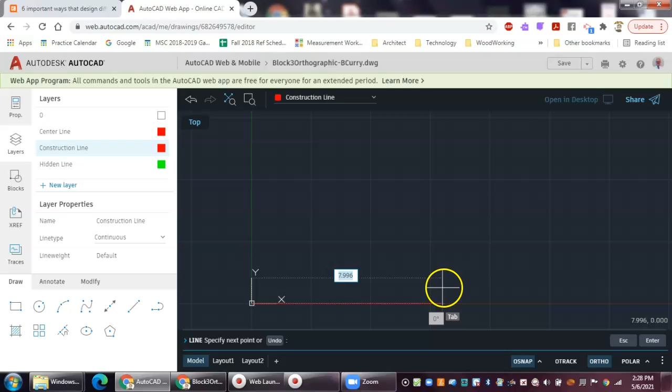In this case, I want a 20-inch line. So I move my cursor to the right, at 0 degrees, type in 20 on the keyboard, and hit enter, and I've got my line. Now I'm zoomed in a little too far, so I'll right click and confirm to drop that line, then zoom out.

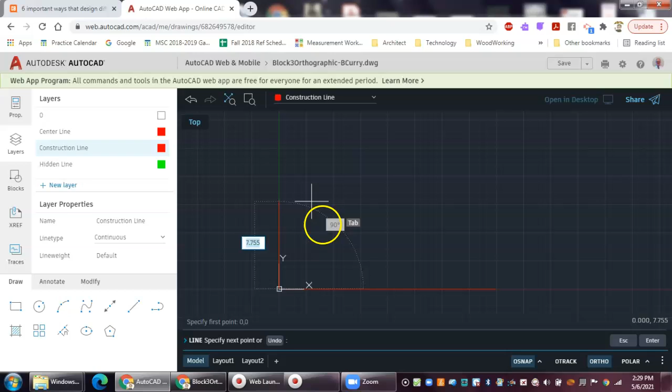So there we go. Now I'll do the vertical line here too. My left hand enters 0, 0, hit enter, move my cursor up, type in 20 and enter, and I've got that line. I'll right click to confirm and get out of it. So there's the start of my lines.

Now I'm going to go into my modify panel to the offset tool, and this is where I want to start developing my different lengths here for my width, my height, my depth, those parts that we give to you. So my width of this part is going to be 6. Now read what it says in the command bar: offset, specify offset distance or through, erase, layer. You don't know what through or erase or layer is just yet, so we're just going to offset that distance. We know our width, so when we offset this vertical line first, that first space we're doing is for the width of it.

In this case it's 6 inches, so I'll enter 6 and hit enter, select the line, and move it to the right. Notice it's there — if I hit the enter key on the keyboard it kind of takes it off, so we'll do this again: 6, enter with the keyboard. Now I'll left click with my mouse, move it over, and left click to place. Now I'm going to click on the line I just dropped — the next vertical line will give us our space between views.

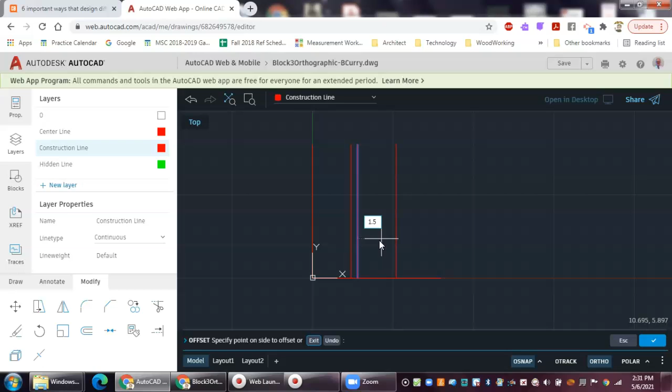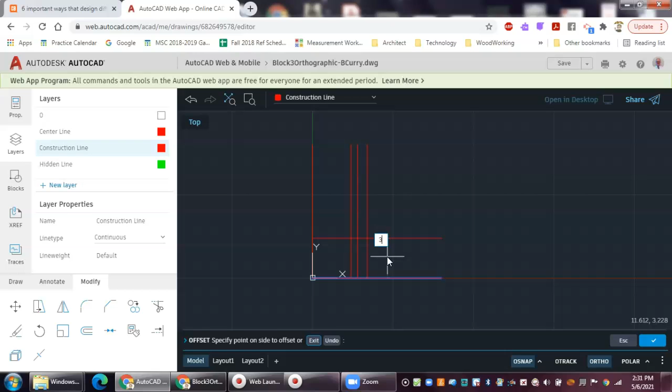Again, this isn't 6 inches, but this is going to represent our depth, which should be 1.5, and enter with the keyboard. Now I'm down here for my horizontal, and I'm going to go up. Don't just place it at 6 inches, because then you'll have a 6 by 6 inch block. Our block isn't 6 by 6, it's 6 by 3. So I got to set this for my height, which is 3 inches. Enter using my keypad. I click that line, move up.

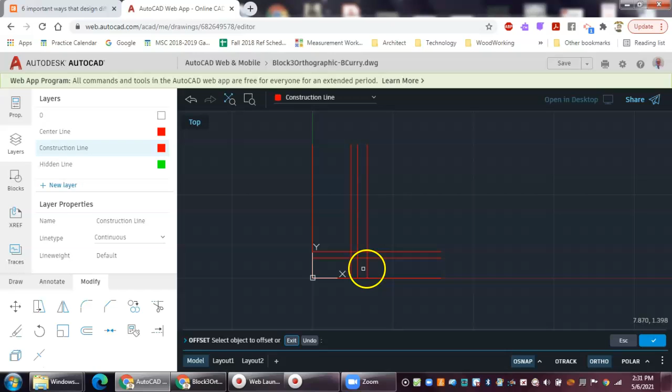This is my spacing between views here again, so I hit 1 and enter on my keyboard. That way I got 1 inch spacing between my front and side view, and 1 inch spacing between my front and top view. Now this last horizontal line that I'm placing represents my depth, so 1.5 here and enter.

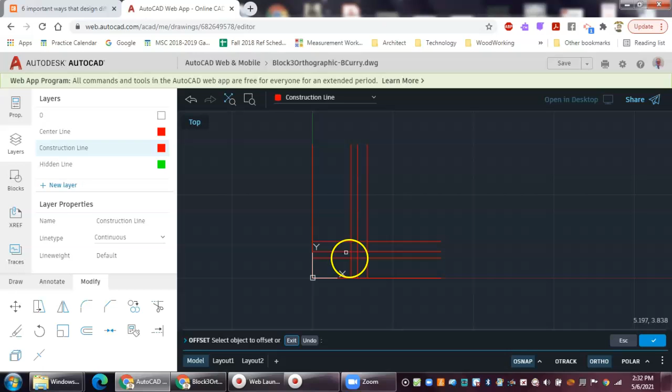So I've got those in, and you're still saying, okay, well, where's the 8th line or the 9th line? I only got 8 lines there, 4 vertical and 4 horizontal. So that 9th line comes from a special place. It comes from right there.

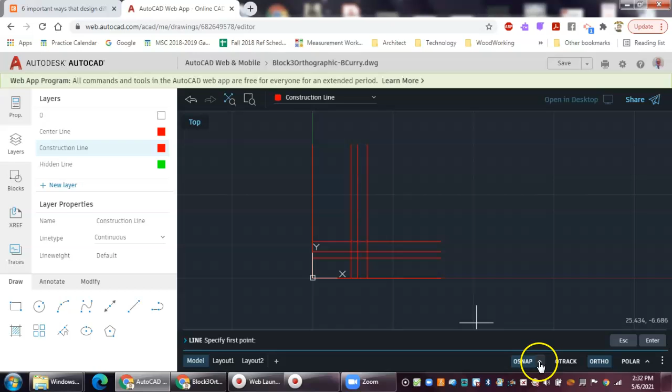Let's go back to our draw panel, our line tool. Notice I'm coming over here, nothing's kind of clicking, so none of my snaps are turned on. So let's come over here, I'm going to hit that drop pop-up window, and select, in this case, intersection. Now notice how it gives me that point, so I'm going to left click there for my line.

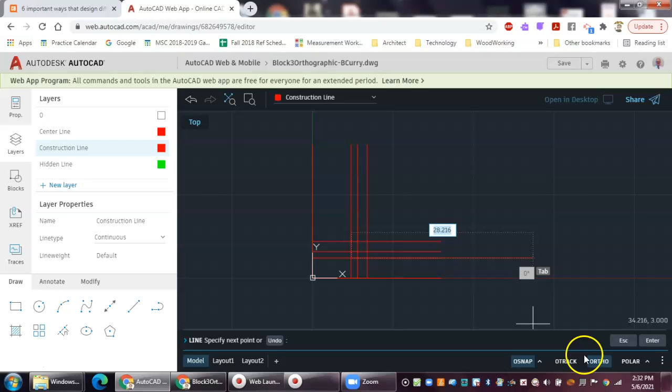Notice how it's still wanting to just give us vertical or horizontal. That's because we still have ortho turned on, so let me turn ortho off. Now I can come in here, and this is just going to be a 5-inch line. I'm going to hit 5, tab over, and do 45 degrees, enter. So there we go, right click to confirm and exit out, and I got my 9 lines on here.

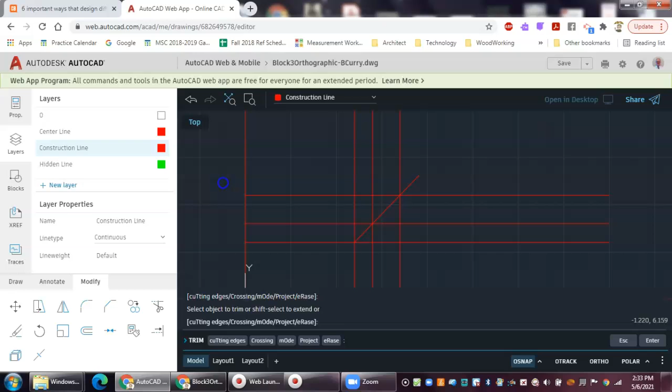Now we're going to trim out these that we don't need. Back to my modify panel, use my trim. I'm going to come up here, press down and hold on the left mouse button, and just kind of move over those lines to trim all of them out. And I'm done, so I can just click on the check.

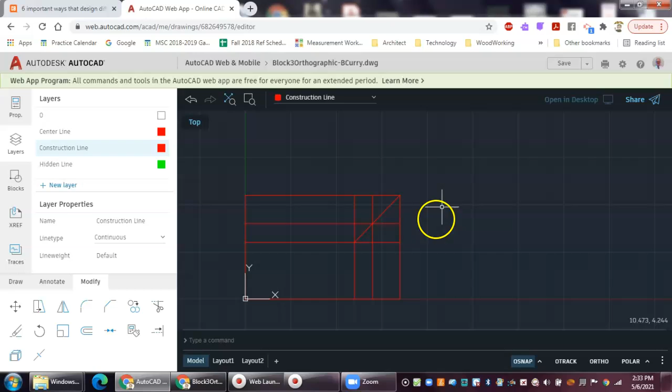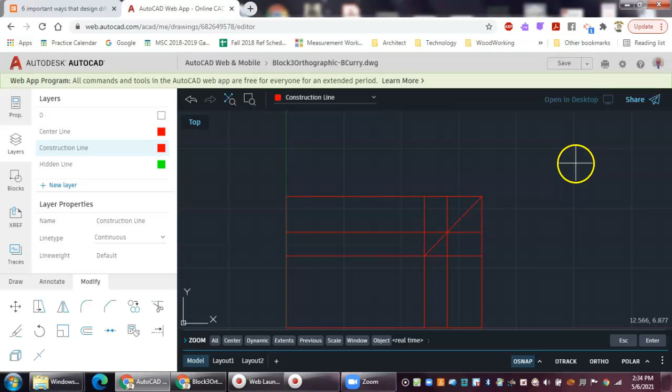So I'm going to do a zoom all. Again, notice my right hand is still on the mouse, I'm just taking my left hand to the keyboard. I'm going to hit Z, enter, A, enter for zoom all. Or I can go Z, enter, notice all the commands down here. I could go ahead and move my cursor over, but if my cursor's over here, that's a lot of wasted movement. So it's easier in this case just to use my keyboard for entry, and I'll type E for extents and hit enter, and zoom in a little closer.

All right, so there is where we've got our 9 lines. This represents the outside dimensions of each of those views of my block. Now I want to get where the inside features are going to be, so I'm going back to our CAD drawing here. So again, we know that we've got this inside feature here, and this should look like a U.

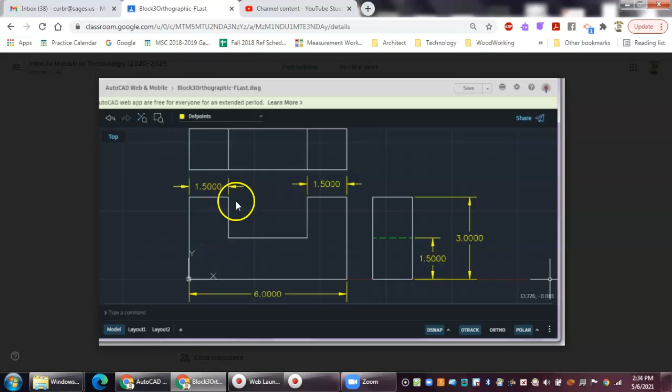So I'm going to put some construction lines in. I'm going to put construction lines in so I know where this line is going to come in both views, and where I know that line is going to come in both views.

And I'm also going to put a construction line in going this way so I know where this line is going to be. Notice that this is going to be a hidden line as well. So let me get in here now, and we can go back and take care of that.

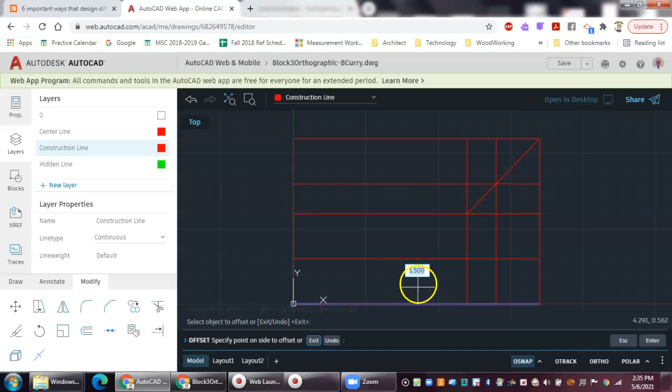Back to my offset tool. In this case, my offset is going to be half of 3, so I'm going to go 1.5 and enter. Then I'll click on that tool, and it's 1.5, and I left click to drop it.

Well, again, we're still in the same tool, and we know that this is the same, so I'll left click on this, move it, and drop it. Then of course from the other side of the front view, we get this one. There we go, so that gets those in.

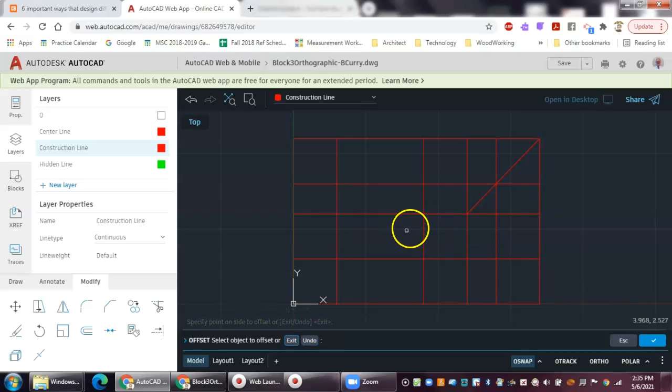Now I've got these in spot. I go back to my object lines, and now I start to fill in and say, okay, well, now I know exactly where my true line or the object lines actually needs to be. So let me go in. I think I need some endpoints here too on my object snaps.

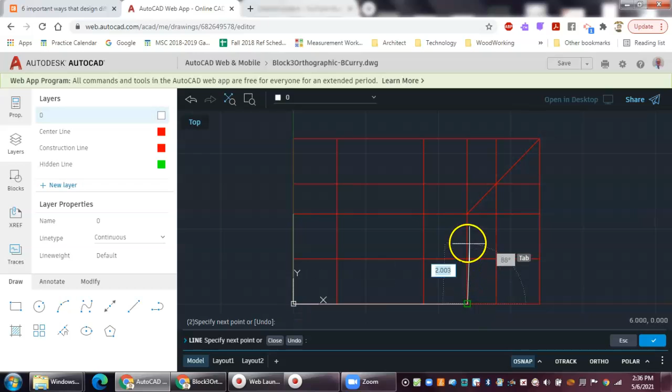So let's go draw, and we will pick these up. We're going to now just continue to use the draw line tool to go back and forth over each of these spots, picking all of these up. Watch your snaps, because sometimes it wants to snap to the wrong place, especially if you're close to midpoints or other features. Okay, so I've got the full front view in.

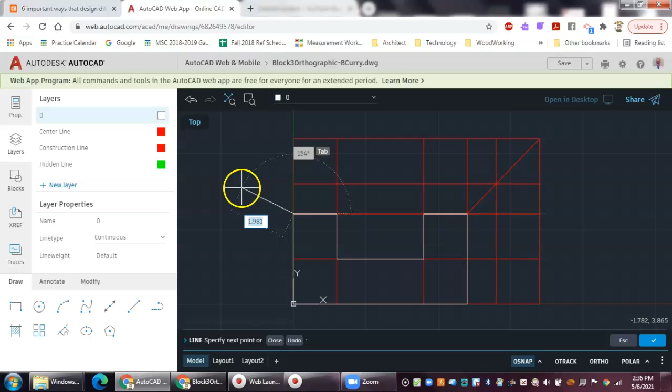So let me right click and confirm to get out of that. I'll right click and repeat last command. So, going in here, this is our side view, what it should look like. There we go.

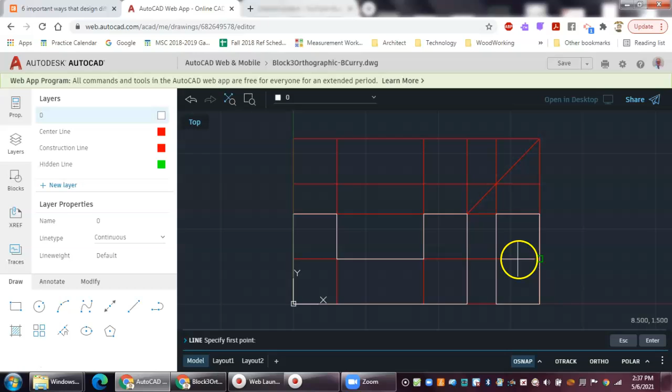And confirm. Okay, now I'm still showing that line right here, so we have to think about it. Do I need and should this line be here? And should it be a solid object line or should it be some other type of line? Well, again, as we know from moving these blocks around, that this should be a hidden line. So I'm going to hold off on that.

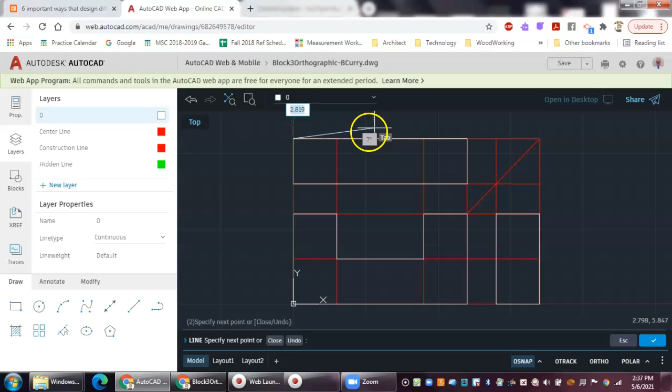I'm going to go ahead and get my solid object lines drawn up here in the top view. I will mention that object lines override and take precedence over hidden lines and center lines. That's why on drawings, you're going to see object lines over hidden lines. And if you have a center line and an object line on the same plane or the same line, your object line is going to override that too.

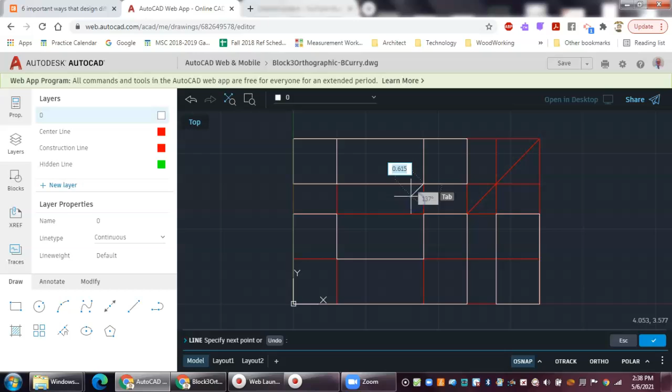All right, so there is what the top view looks like. Confirm that. Now, the only thing I need to do is draw that hidden line here, and to do that, I got to activate and draw on the hidden line layer. So I'll make that active. That layer is now active. Now I can come back to the line.

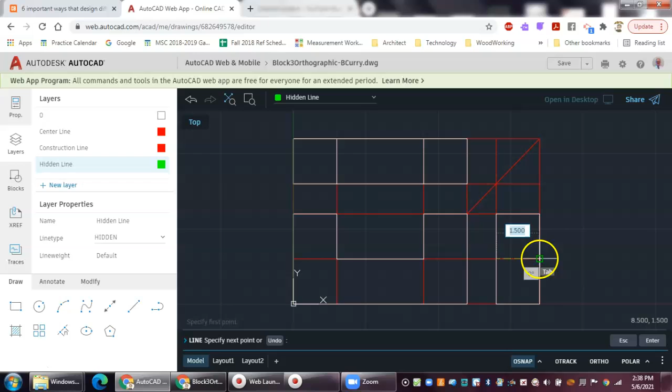I'll draw from here to there to get that put in place. Right click confirm to get out. And then lastly, I'm just going to go ahead and click on the light bulb to turn my construction line layer off. And this is left with what this drawing should look like in your front, top, and side views.

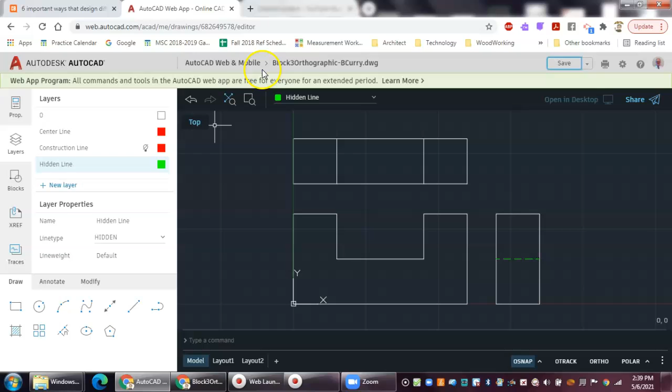So that finishes up. I'll just go up and do a file save because I've already saved it as block 3, so we'll just do a file save here to make sure that we save it. Then I can go back once that's saved, so taking a little bit of time. Once it's saved, then I can go right back to the main screen of the AutoCAD web version. And that completes this tutorial for block 3 orthographic drawing.